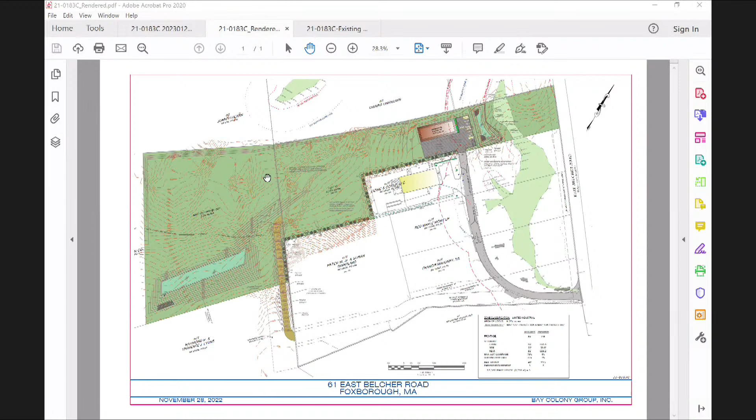61 East Belcher Road consists of two parcels totaling 9.57 acres. We have this front parcel here that our client has owned, and then we have this rear parcel here that our client just recently acquired. These parcels are located on the southwestern side of East Belcher Road, which is out over here. This back parcel is currently undeveloped and consists of a wooded area, while the front parcel consists majority of a gravel area.

And then there's a wood line. It's kind of hard to see it, but it's right around here. Now, someday you're going to get smart enough to get that cursor in red or something so you can follow it. Let me see if I can zoom in for you. It's right there in blue. Okay.

So this lot is serviced by a common driveway off of East Belcher Road. The property contains bordering vegetated wetlands in the front of the property, which we can see here. And there's also wetlands to the north of the property out back, but the buffer zone doesn't cross onto our property at all.

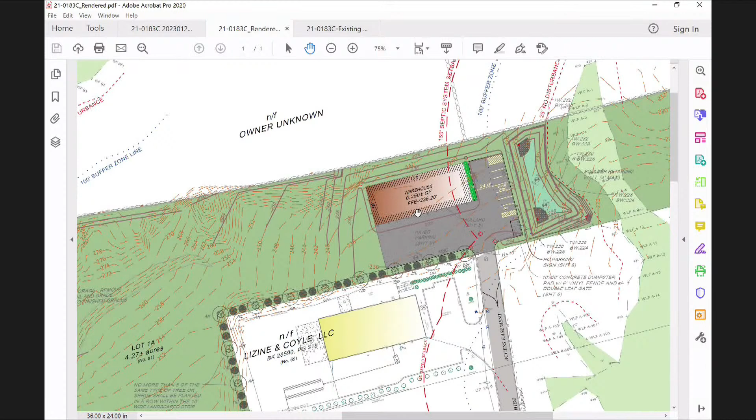Our client is proposing the construction of a 6,250 square foot warehouse along with the associated parking, grading, and utilities. A portion of the parking area, the grading, and the stormwater basin will be within the 100-foot buffer zone. I have the 100-foot buffer zone right here in the dots.

You can see the portion of the parking area right there within it, and the stormwater basin is entirely within it. The parking area will sit about 78 feet from the wetland at its closest point, and grading will take place about 27 feet from the wetland at its closest point. In all, it will be about 11,000 square feet of buffer zone being altered due to this project. We're not proposing any work within the 25-foot no disturb.

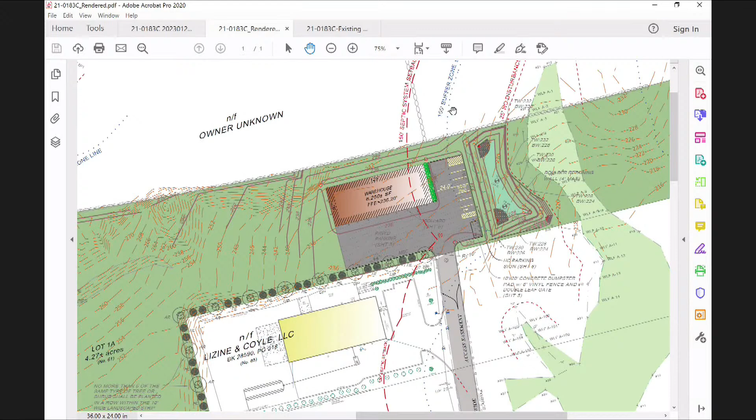This facility will be serviced by municipal water and a conventional septic system. I'm sorry, I don't show my septic system on my rendering here, but if you have the site plan, you can turn to sheet 4. The septic system is going to be located in front of the building right here, and it will be at least 150 feet away from the wetland, which meets the commission setback.

The stormwater system for this project will consist of roof drains, deep sump catch basins, and a stormwater basin. The runoff from the parking area will be treated by the catch basins before being conveyed to the stormwater basin, and the roof runoff will be conveyed separately to the stormwater basin. The stormwater system has been designed to comply with the DEP stormwater standards, as well as the Town of Foxborough stormwater management bylaws. The town's consultant has also recently reviewed the stormwater system, and we addressed all their comments. There's no major modifications to the site plan.

Erosion control for this project will consist of silt socks and silt sacks that will be installed prior to the start of construction and maintained until the project is complete and ground cover has been reestablished. A stabilized construction entrance is also proposed to prevent the tracking of sediment off-site.

Lastly, this site also lies within a Natural Heritage and Endangered Species Program priority habitat. Our client has taken the necessary steps by working with Oxbow Associates to submit a Massachusetts Endangered Species Act review in April of 2022. The division reviewed the project and issued a permit in September of 2022 with the condition that a turtle protection plan be submitted. Oxbow Associates has prepared a Blandings turtle plan for the site, which was included in my notice of intent packet.

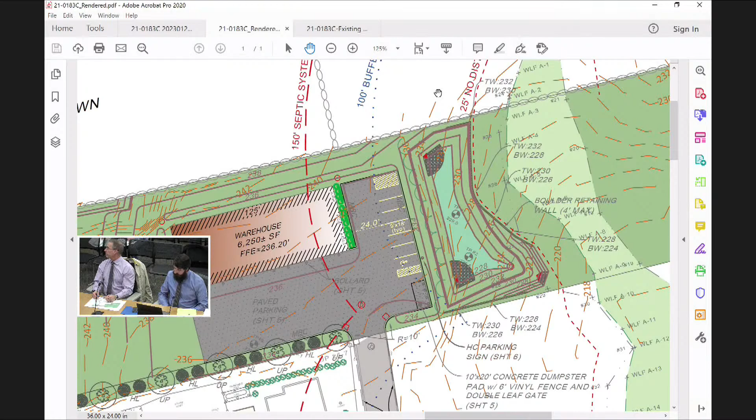So the blue right here is that wood line, and there's basically a build-up right there. Okay, and then after that wood line, nothing has been disturbed. Yep, so at this point, everything—what is that, is that 75 feet? Maybe 80, roughly, somewhere there. I mean, anything outside that hasn't been disturbed yet? Okay.

Now, getting back to the question of what our jurisdiction is—are you going to be grading on the other side of that pond as well? So I'm sorry, it's kind of tough to tell. So this is a rock wall, or a wall that I have proposed right here, and then I kind of just grade off into catching those existing grades while trying to keep everything out of that 25-foot no disturb zone. So you will be grading in that area then? Yeah, so we'll be grading that area, but we don't have any plans to go within that 25-foot no touch.

Okay, on that basin, is that—I mean, I'm looking at that, that's what, 230 feet right now? Is that correct? Yeah, so the top of my basin, I'm pretty sure I have it at 234. But yeah, so I got 236, and then it slopes off pretty drastically to that berm down to 230, 228.

Is that similar to what it is right now then? Yes, it kind of follows the shape of what is out there right now. Okay, all right, yep. That's, looking at the map without the work on, that's kind of what it looks like. Yeah, yeah. If you, when we go out there, you can see it's a pretty big build-up there. Yep.

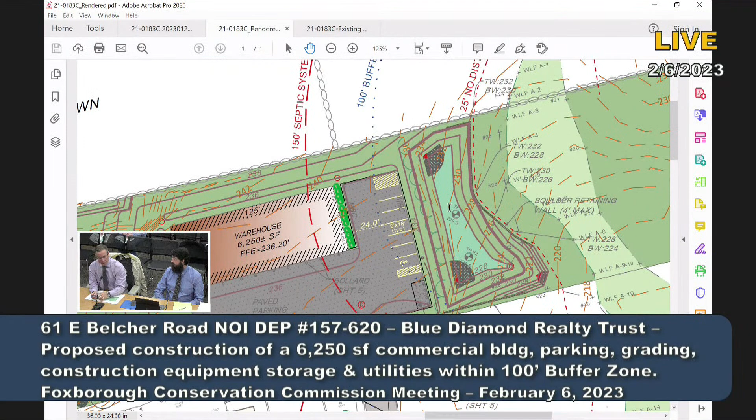The earth removal bylaw is old. I don't even know exactly, but normally I have a lot of history in my head. I think that bylaw was put in the 70s, or even the 60s. I'm guessing it was put in when 95 and 495 were being built, so land didn't have a lot of value, but the earth did.

So you come into Foxborough, and I can name some of the sites, because as a kid we used to drink there. We had the Spruce Street pits. That area was all gravelled out, probably for 495. Down by where I grew up was the Gavin's Pond area, which you guys are all familiar with. That whole area, now the Ames, and down in that area we used to call Tanglewood, was a whole gravel area, including going into Sharon. And on Beach Street, if you go halfway down from Mechanic Street, look on the right, you see this big rock face with a couple houses up there. That was all gravelled out.

So the earth removal bylaw was put in not for site plans and stuff like that. Whenever we go before them, I just went before the Board of Selectmen for one for a single-family house, and we had no buffer zones. They do it, it's like any other regulation. They have to look at it and say, what's the purpose of the reg, and does it meet it?

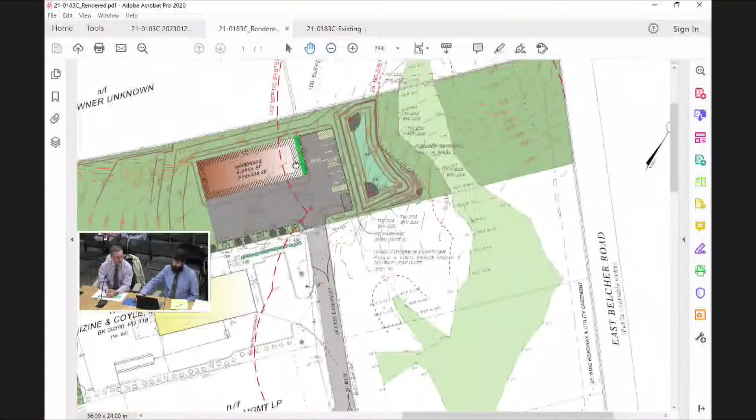But the earth removal we're talking about is on the back lot, Cam. It's not in the front lot. The front lot is pretty much done, except for down near the building. This area back here is where all of the work is, or most of the work, is going to take place.

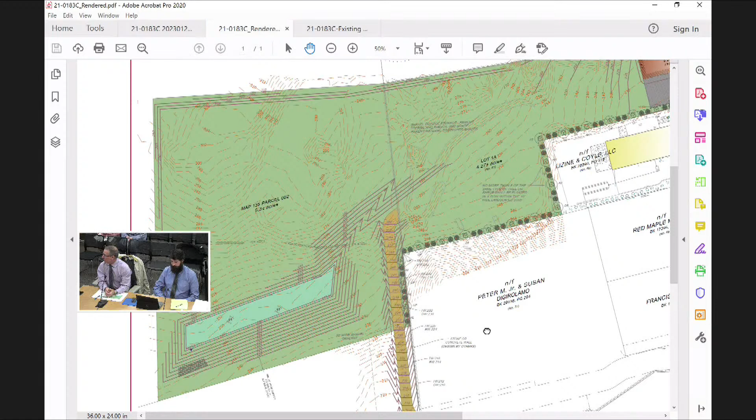When Jane said a 30-foot cut, that 30-foot cut is in the top left as you're looking at it, where the rocks are. So that area there is the area where the gravel will be removed.

But buffer zones are meant for a reason. Even these days, there's a reason for buffer zones with neighbors.

And then you have some endangered species habitat out there, though. Well, they've got the Foxborough report and the sign off. There's a possibility of Blanding's turtles coming in, and that's on wildlands, conservation land that they just received from some property owners. I think you still have that as unknown, right?

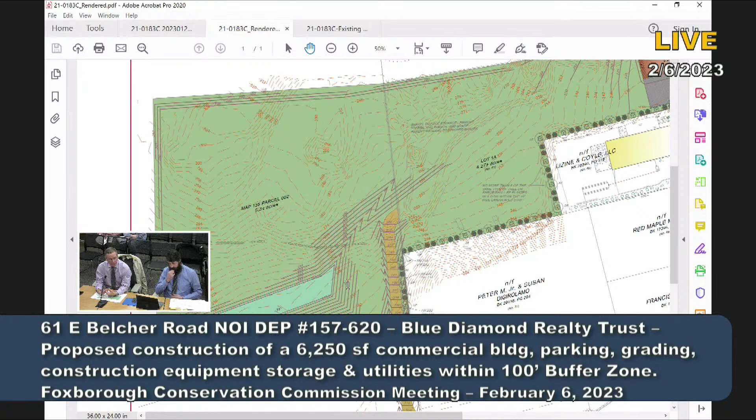No, it's to the left there. The owner unknown is to the north. We don't know who the owner is, the town doesn't know who the owner is. But it's the same person, the same entity that sold the land to my client. They sold it to 3 different people: to my client, to the Lions Greenhouse on Spring Street, and to this wildlife trust you're talking about. So it's true, and I understand what you're saying, it's a good point.

But we have no neighbors, so it's not a buffer issue. Typically, a buffer is to protect you from looking at things or noise or whatever, but there's nothing out there, it's all vacant land. Like I said, if the selectmen decide 50 feet, then we'll have to do 50 feet, it's up to them. But right now, we're just showing 10, which is a zoning requirement.

Does anybody want to do a site walk that wasn't able to make it? Yeah, right, I would go, yeah.

All right, when is convenient for everyone? Probably never. Jeff, what's your schedule look like? I could do it tomorrow around noon, and I could do Thursday easily. Dave, maybe 1? I'm open.

Let's ask the critical question: what's the weather going to be like? Thursday's supposed to rain, not as cold as it was over the weekend, 60% chance of rain Thursday. No, that's not a good one. Tomorrow's 40, Wednesday's 50, Friday is 60. Are you talking temperatures? Yes, temperatures. Okay, all right.

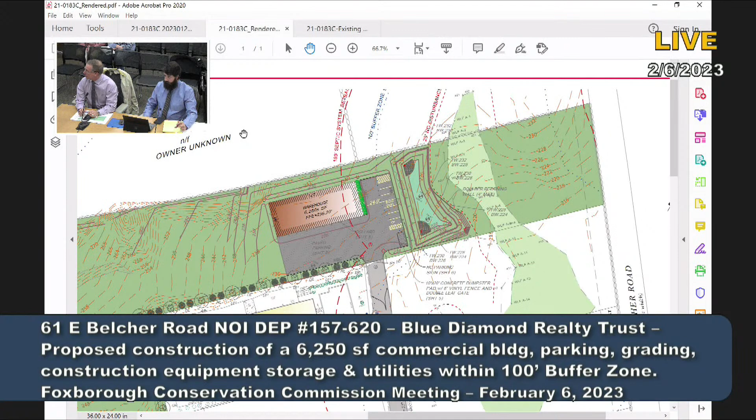So, what do you want? Well, like anybody else, we just want to make maximum use of our property. You can see if we move it to the back, the grade lines behind the building—that's more cutting if we had to flatten that out. And it fits; when you drive straight in the driveway, you pull right in there and don't have to go in front of the bays. So the stuff on the big asphalt is truck bay access. Yes, that's the only paved place. The rest of the site will just be gravel.

Now, does the fire department require access all around the buildings any longer? I'm 90% sure what they want is around 3 sides of the building. But they'll also get to make comments to the planning board when we hear from them Thursday—I know sometimes they want full access. It just depends on the chief, but right now I think 3 is the magic number, and we'll know Thursday once we get the comments from them. I haven't seen any comments from any town staff. Diana usually sends them to us.

I've been living in ZBA world. So I come back to the same question: why can't they take all that paving on that side of the building, put it on the other side, turn the building around, so there's less impact in the buffer zone?

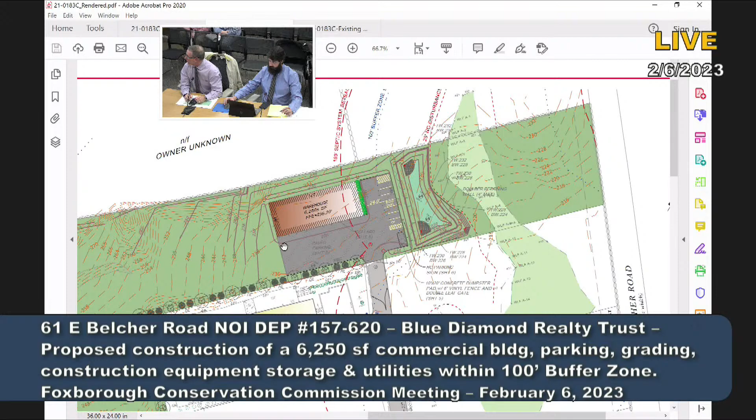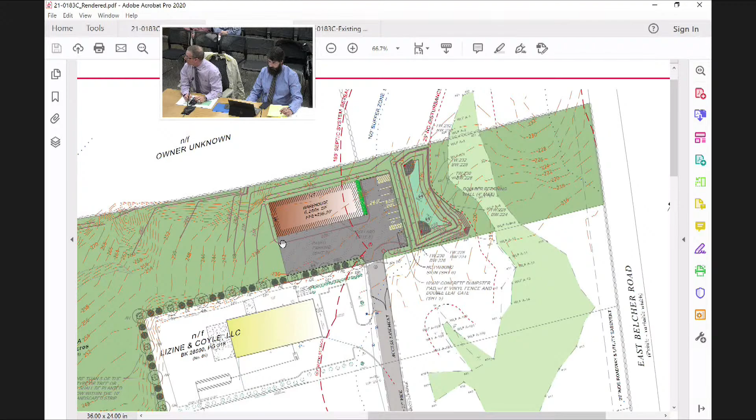I think where that parking is, though, isn't that already cleared? It is, yeah, that paving's just going on top of what's already gravel at the moment, right? Yes. I'm just trying to get it out of the buffer zone, because you're consuming 75 feet of wooded areas. But there are no woods there where that is now. No, I mean where his basin is proposed—yeah, basically you're wiping out 75 feet of buffer. Well, a little bit less than the other part of it.

Are you going to be doing a 21E for all those stains and spots? Probably not. That stuff needs to be cleaned up.

The good thing about something like this is when pavement is captured and brought into a catch basin where it's treated. If you look at catch basins nowadays, back when we were kids they had open bottoms and the water just went through. Now they're all solid and hold four feet of water with an elbow, so greases and anything lighter than water sit up in there and typically just evaporate, they don't go out into the basin. That's one of the positives of why paving is there. But no, we wouldn't do 21E for just stuff like that.

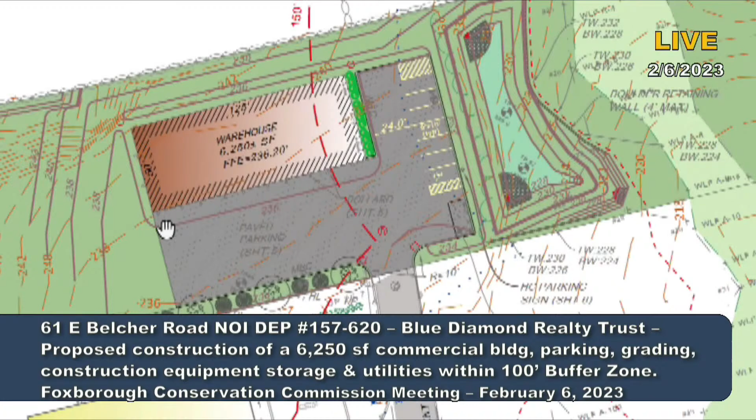Anything else? Nope. Motion to continue until our next meeting. Make that motion? Second? Discussion? Oh, before we do that, Jane, any final comment?

No, my report says it all. Bob, I'm really feeling pretty awful. I have to sign out, I can't continue this meeting, I've got to go to bed, I really feel terrible. Okay, feel better, Jane. All right, thanks guys, okay, feel better.

Any comments from the audience? I texted Gabby and asked her if the fire department wants access all around the building, and she says not anymore. She also said there's no comments from any departments yet, Bill.

Okay, Pete, so pick me up tomorrow? He'll pick you up? Yeah. Okay, yeah, yeah, I can do that.

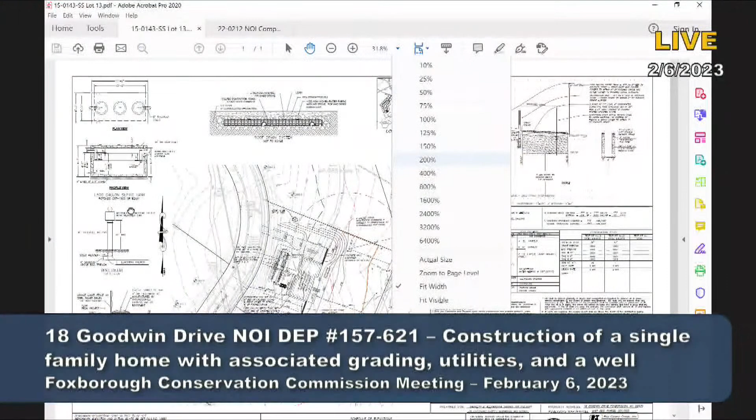What you have before you is a single-family home located at 18 Goodwin Drive. I'm going to zoom in here onto the locus plan to show you where in the subdivision. This is up in the Lawson Farm subdivision. If you came in the main road, you hit the first intersection. I don't know how many people have been up there lately, but the first phase is complete—all the houses have been built, and most of the infrastructure and roadway, though some sidewalk still needs to be put in, and some islands at the entrance. But the roadways are in, trees, etc.

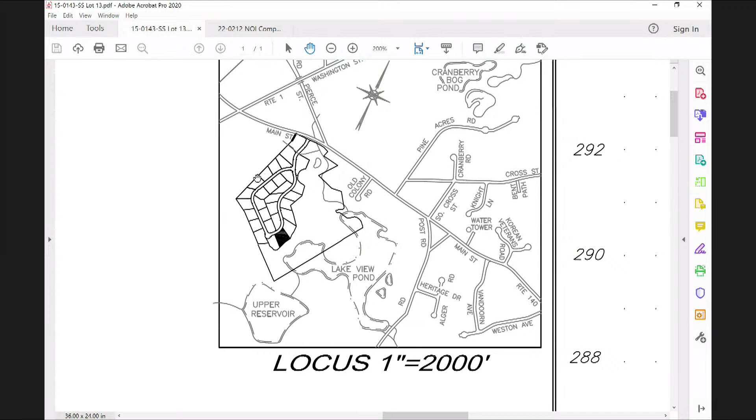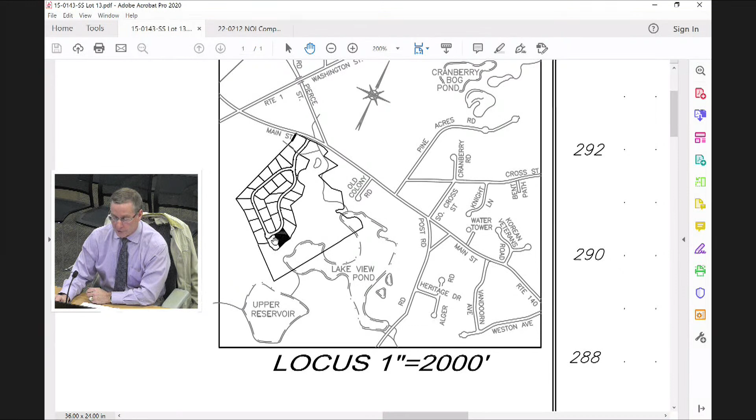But if you came in, went up the hill, and then came down here, this is the second phase that's just been built in the last couple of months. It's been paved pretty much to right about here. Number 18 is this lot down here. So you come down to the cul-de-sac, take the left, which is the only turn you can make, and it's not the first lot there, but the second lot on the left. Let me zoom back out.

This lot is undeveloped and contains about 52,000 square feet. It's in the R40 zoning district, which requires 40,000 square feet and 200 feet of frontage. There is some bordering vegetated wetland on the property in this corner, only a small portion—about 450 square feet—is in BVW.

I don't know if the commissioners remember, it's been a while, but this was originally an 80-acre parcel. When we subdivided it, we took about 40 acres and set it aside, which the commission will be owning someday, hopefully shortly. The quicker we get this built, the quicker we get it conveyed.

And what we did is we tried to cut out the lot lines so that there was little to no wetland on the lots. If you take a look up here or look at your plans, you can see there's a little path along the back there.

And it's actually not little, but there's a path along the back there, right along the edge of the property line. So this lot is on the property. It faces what will be future conservation land, has a small portion of wetland on it, and we're going to propose to build a single-family home. I tried to put it in color this time to make it better for us.

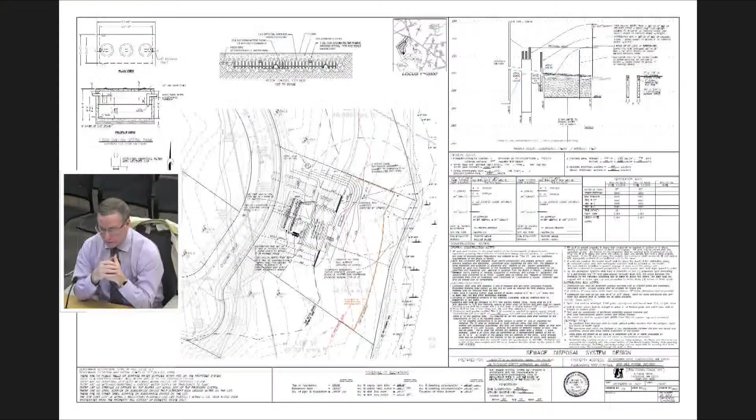This lot, if anybody's had a chance to get out there, and you'll see it on all of the lots, because I'll be coming in for these 4 or 5 homes that are along the line here, if you stand on the road, all of them drop off. As you can imagine, we're on the side of a hill, and we're looking toward Lakeview Pond. So these lots are definite walkouts, and anybody who doesn't want to walk out is a little bit crazy, but that's okay. This is a walkout, and it's along the whole back of the property.

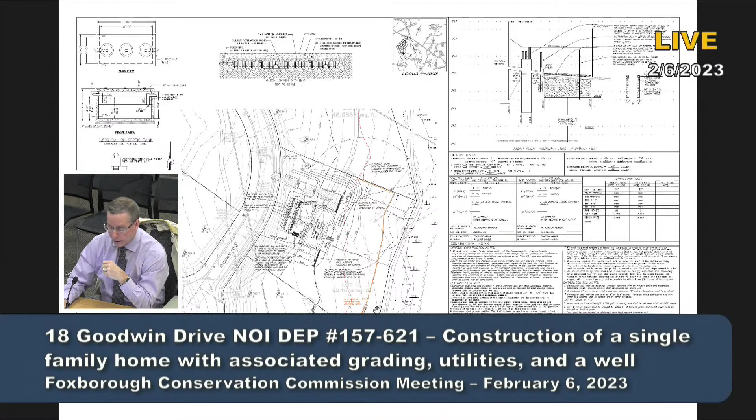So you can see this area in here. This is buffer zone work. We're grading in this area here, but the remainder of the area we are clearing. I know it's hard to see, but we are clearing this portion of the lot, and it's a lot of clearing along the back there.

We've stayed outside the 25-foot no disturb zone. But when you have a home like this, a young couple, they want to have a family, they want to have a yard, and that's what most people want to do, especially when they're buying big lots like this. So the proposed home sits about 114 feet from the BVW at its closest point, and then the clearing and grading will take place about 32 feet from the BVW at its closest point.

Which is this area right in here. This is the 25-foot line. You can see along here, only this portion of the lot has the 25-foot on it, and the remainder of it is well outside. But in this area here, where it kind of noses up into the lot, this is the area of closest clearing.

It's hard to see again, but you can see this note right here. There's a permanent monument there, there, there, and they're about 25 feet apart, on the 25-foot no disturb line. And what they are, as you've seen before, is concrete monuments. We put into the ground, they're 3 feet, we leave about 6 inches sticking up, and we put those plaques on them. So this tells any homeowner, hey, look, don't go beyond this, basically, without permission of the commission. So that area will be marked.

The total impervious area on the lot is only going to be 9% of the total lot area. None of that is within 100 feet of the BVW. The septic system is located in the front of the house, this area here. This heavier black line, the 150-foot, is the septic system setback line, and you can see the system is here. It's about 178 feet at the closest point from the wetlands.

I talked about the silt sock barrier, I talked about the monuments. The construction sequence for this type of project is very general, you know, until we have a contractor, but really it's almost always the same. They'll cut the trees down before they grub, put the erosion control fence in, then remove the stumps and grub it.

They bring the site to subgrade, which in this particular case is mostly in the front of the house. There will be some filling underneath the house. And over here on the north side, you can see there's a significant amount of filling in this area here, and that's because of the driveway.

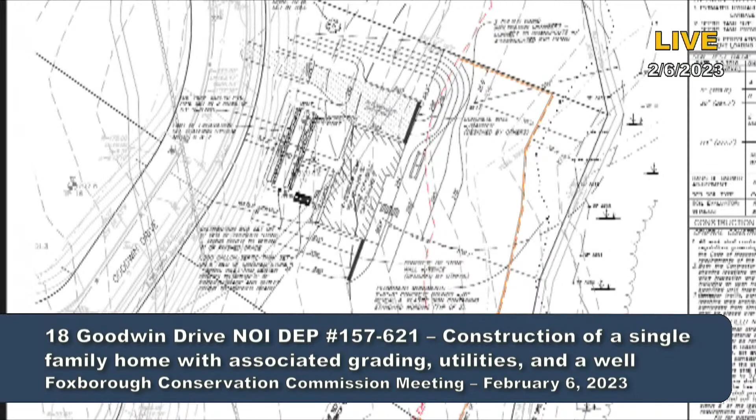So Jane made some comments in her letter, or maybe it was an email to me. She and I were talking about it, and she said, why don't you move the grading over here to the south side of the house, and that way we can push the grading further away from the wetlands and the buffer zone.

Let me show you why I explained it to her. I don't know if she passed it on to you. So if you look in this area here, I know it's hard to see, but right down in this area we're at about elevation 297 feet above sea level. The driveway is 292, so that's about 50, maybe 60 feet, about a 5-foot drop. That's pretty steep. I mean, it doesn't sound like a lot, but it's a steep drop, coming in and then going down. But then we flatten it out on the bottom.

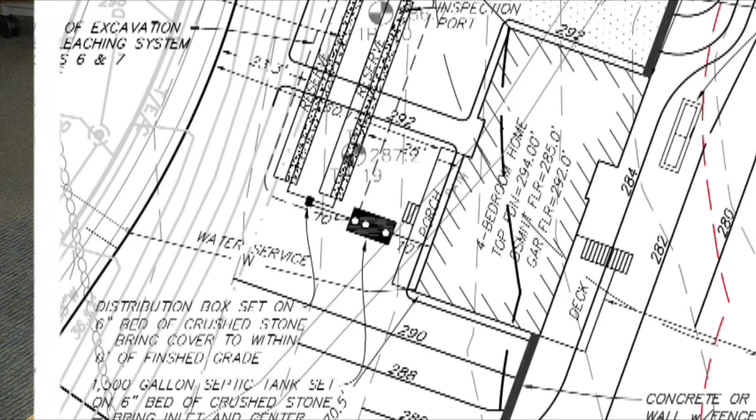So that, and even that includes bringing in fill underneath this garage and driveway. So we picked the house up as much as we could, but even then, the top of foundation is 294, and I know I'm throwing a lot of numbers at you, 294 above sea level, and in front here, it's 298 above sea level.

So that top of foundation is going to be about 4 feet below the road there. But when you go out there and look at that road, if you brought the driveway in over here, that elevation's 302, because this road is going down in that direction. So now we're at 302, and the garage floor is at 292, so now we have a 10-foot drop. That's just not acceptable.

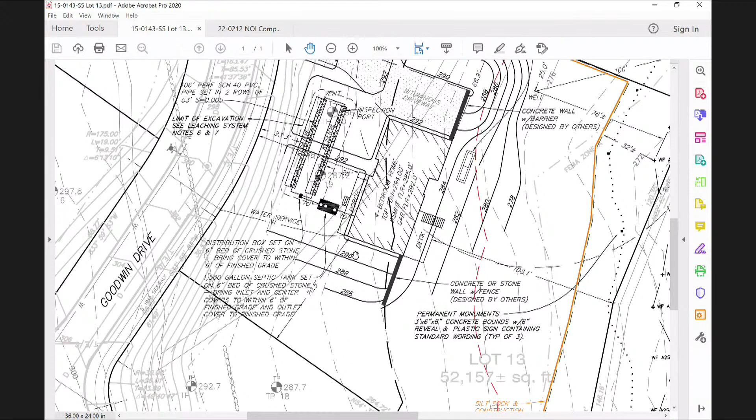I'm laughing because I've got 14, 15. Yeah, you have it. That's why it's not acceptable. I mean, yeah, you suck it up when you bought a house like that, but not when you're building new construction.

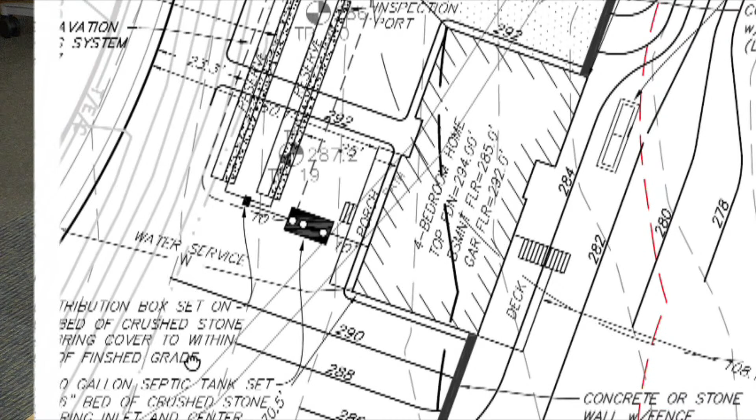We want to try and hold the grade to 5 or 6%, because we do live in New England, even though we haven't seen snow in 3 years. But so that's why, and I explained that to Jane, and she said thank you, gave me a comment back. So this is really the most practical area to put a driveway on based on the grades out there. And yes, we do have some grading back there, but we have put walls out there in order to minimize what's going on in the back.

There is a well. We're proposing a well on the lot, so you can see that area there. At its closest point, the well is 76 feet from the wetlands, and it's over here on the northeast corner.

They did try and bring it, the Board of Health did consider it, because I had a neighbor that had it in our neighborhood, like off of Linda Street, somebody had it on there, but then, all right, maybe I misheard. This is a while ago when we had the drought, because I planted a lawn that turned to weeds because I couldn't water.

Anyway, I'll tell you what the bylaws are in Foxborough. You can't have an irrigation—if you're a homeowner, you can have an irrigation well, it's all on you, and you can have a well for your house if you want it. Commercial, you cannot irrigate more than 10,000 square feet. So if you have a business and a big lawn, it pertains to places like Lions, but that's agricultural. I don't want to derail the conversation, I was talking off the top of my head. But you can have an irrigation well without limitations in Foxborough.

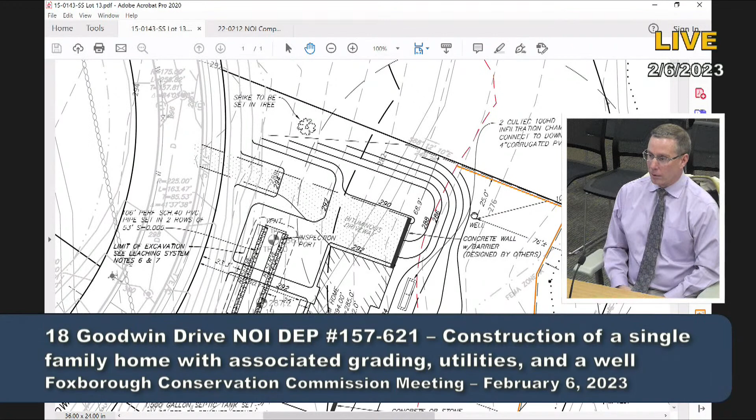The garage is underneath the house, is grade level at that point. So the garage floor is at 292 and the top of foundation is 294. So it's 2 feet below the top of your foundation, maybe 2 steps in your garage.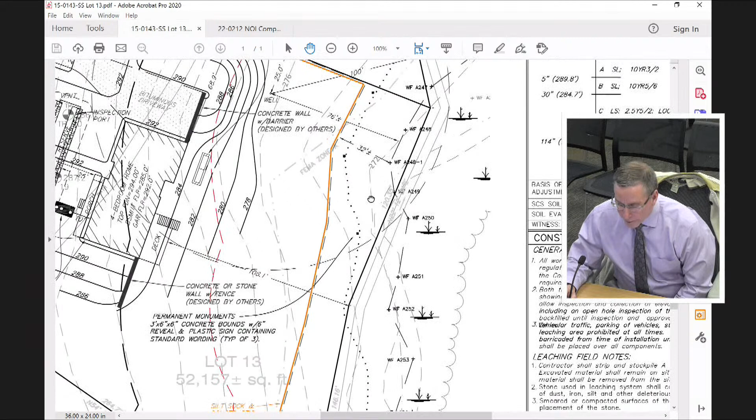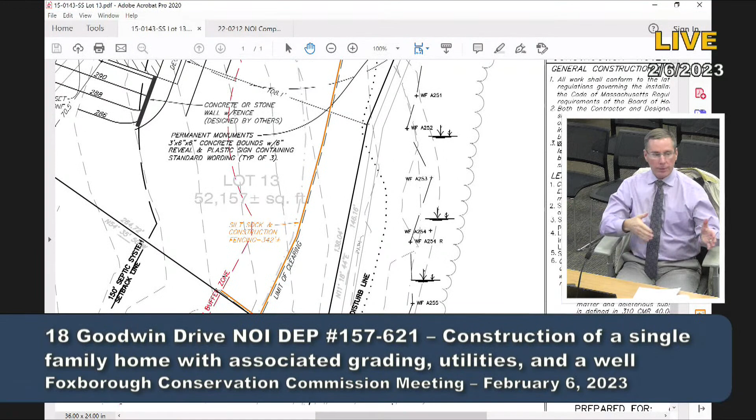Is there any boundary marker on the property line? Yes, in the back here, it's hard to see and it's not on these drawings, though it's on the drawings you approved. See this dot right here? That's a 4-foot high 6x6 post that will have a sign on it that says conservation land. We put that along the trail, anywhere there was an angle point, so when people are walking down the trail, they'll know this is the limit of where you can go. Don't go into people's backyards.

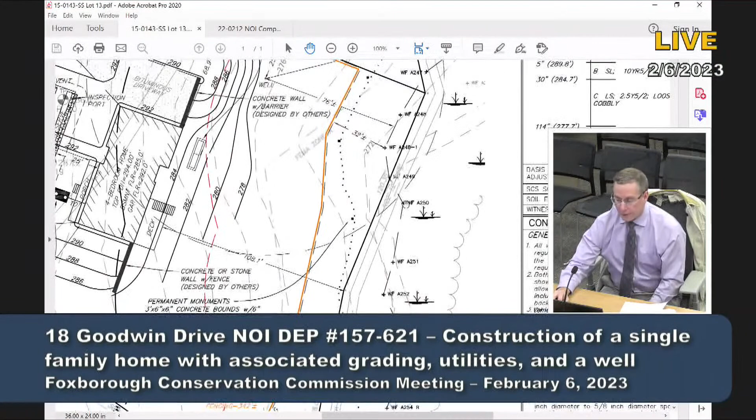My question was, there's no marker on the 25-foot line there, but it's right there at the corner, that edge where you've got the other bound anyway, so it doesn't matter. Yeah, because that's off our property. But on our property, here and here. I was thinking, right there at that point where the 25-foot crosses. Oh, right here. But you've got it right there anyway with the boundary line, so it doesn't matter.

A suggestion - I don't know, as you say, people walking down the pathway, because of that little finger of wetlands coming in there, they're going to end up on private property. I was thinking about it, and a suggestion might be to work with Jane and have the homeowner build an appropriate walkway over that wetland tongue there, to keep them off private property. Other than that, they're going to be walking around that.

It wasn't that wet, though. That path is so obvious, it's in the wet area. Jane and I were walking out there, and it was really wet - that tongue that comes in there. I think the developer could probably be asked to help do that.

I'll talk to Bobby, he'll be fine. I'll have him talk to Jane, see what she wants to do - maybe some stones, some rocks, whatever. But do you agree with that corner being very mushy? Yeah, it's mushy, it's very mushy. And I would also strongly recommend that the homeowner, because the vegetation in there is not very dense, do some heavy planting in that area - appropriate planting, blueberries or whatever.

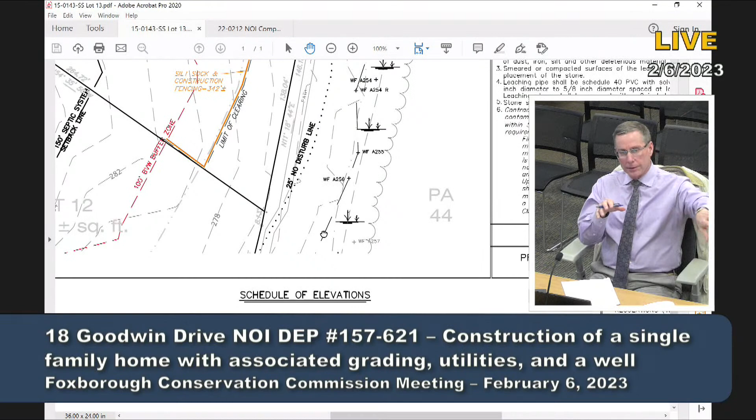It'd be more noticeable, I thought you had them a little bit longer. No, the concrete bounds are 3 feet. You can buy 4-foot granite bounds, but it's much more difficult to put those in. Are they wooden markers? No, they're concrete - these are concrete bounds, the ones we've used on all your projects. London Estates, we just did on that side road to the left, we put those along the yard. We can stick them up further if you want.

But, you know, the deal is, if you stick them up further, the frost will probably push them out of the ground. That's what I was thinking, or you can knock them off, and 6 inches is...

They can be found, I guess, at that point, if we're looking for them. And they're for the homeowner, not for the public.

Last question: off of the cul-de-sac, next to that lot on the left, is there a way down to that path, like we walked? No. So the way it's gonna work, I know you weren't on the board or commission at the time.

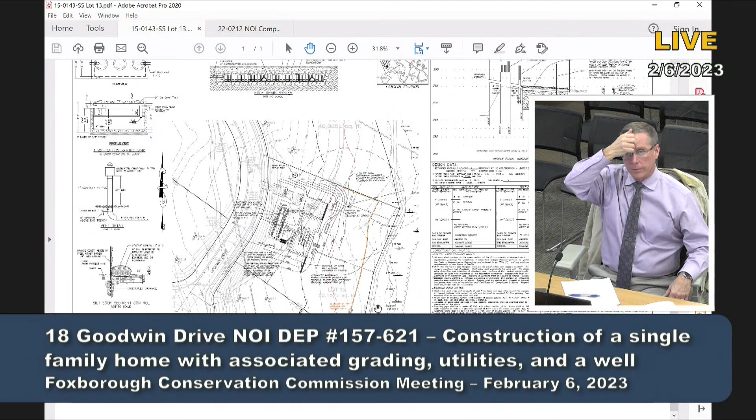So, you guys know the area, you come in off Lakeview and that's how you get there, or you come in off Old Colony Road. So the deal that the developer worked out with the planning board, and I know the commission had input, is this land is gonna be conveyed to the commission, and then one of two things has to happen: he has to provide access to the paths through the subdivision, or give you 10 grand so you can improve access wherever you want in town.

And he has not made a public announcement of what he's going to do. Is there a date on that, when it has to be done? No.

But your stick is, he can't get the roads accepted without an order of certificate of compliance. So the way it normally works is, once everything's done, everything gets passed off, everything gets conveyed, and then the town accepts it. I think this is Old Colony Road here.

He's getting ready to move into the third phase too, so it's good. Does it do a big loop? Does it go all the way around? Actually, it ties into the upper state reservoir forest. The upper reservoir, got it.

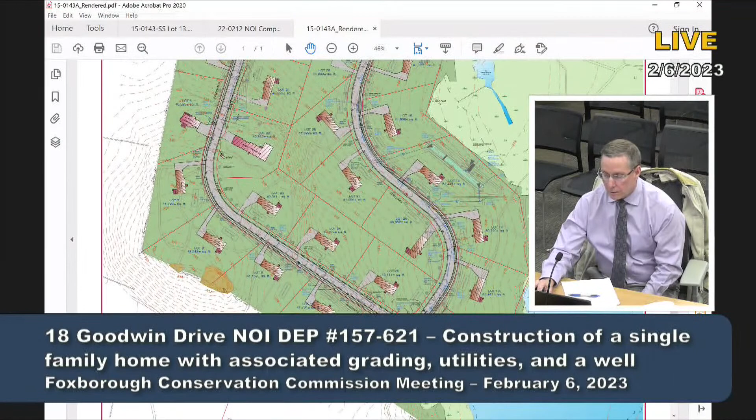So the whole section that's cleared, like next to the driveway, to the lot line, is that all gonna be lawn too, down to that? I know the guys want a big lawn, but I know, like if they went sort of from the corner of the driveway and left that, not just lawn. I was just putting this up in case you wanted to ask questions.

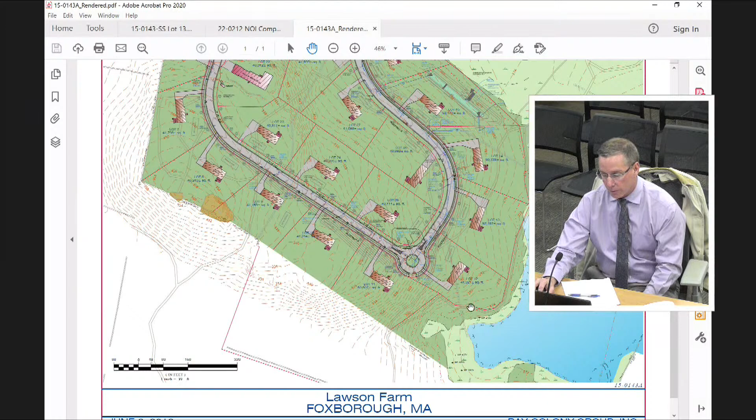Here's the path, it comes in from Lakeview Road, and then it skirts along the edge here. There still is a path, but it kind of ends right there because it's all been knocked out. But if you stay on this path, it goes around, and then it shoots up here in this direction.

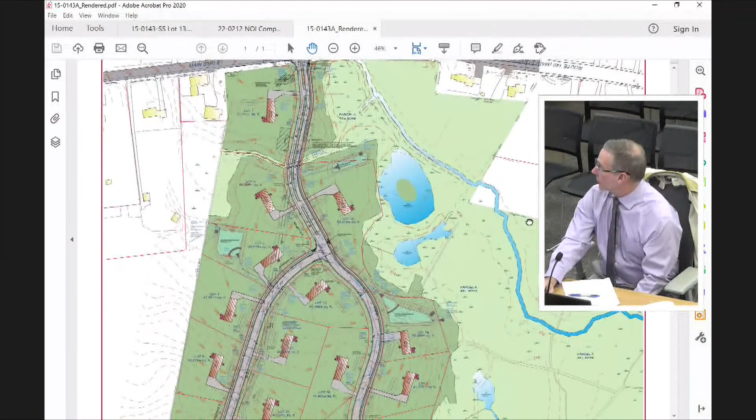And I know you can't see, but you can see how it goes through Lakeview there. Old Colony's on there, isn't it? No, it's just off of it. It's further to the right. Yeah, it's just off of it, but that's where it connects in.

And then this comes over here toward this basin, which would be in the third phase, in this area here. So if I was a betting man, if there was going to be access, it's going to be over in this area here.

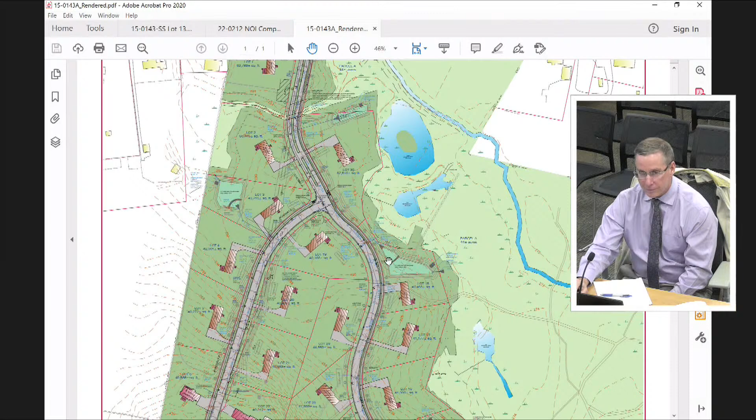Is that basin already in? No. And there's another one down further, closer to this house? That one's in, yeah. This one's in too, it's got this big pile of loam right there.

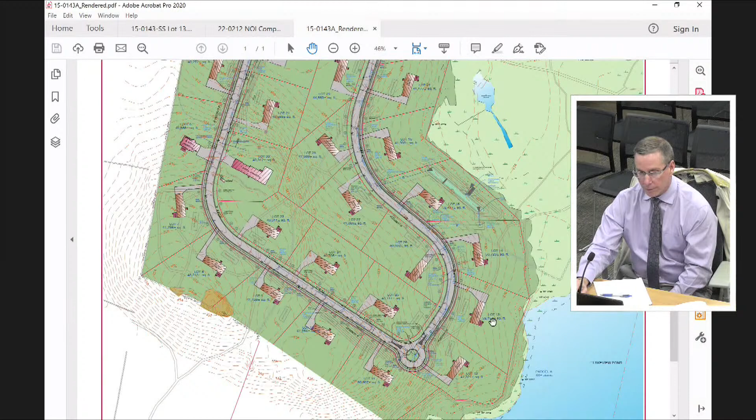This one's in, and the road ends right here. And we're talking about this lot right here. So the road ends right here, and we're stopping right here. Oh, they went that far? Yep, we had to take it that far to put this basin in and get the drainage coming through here.

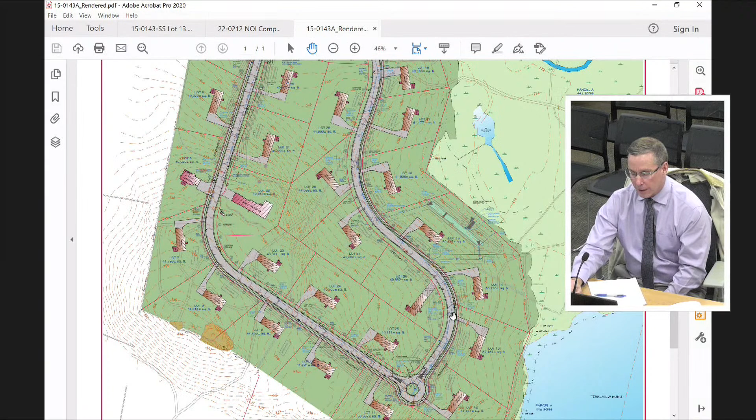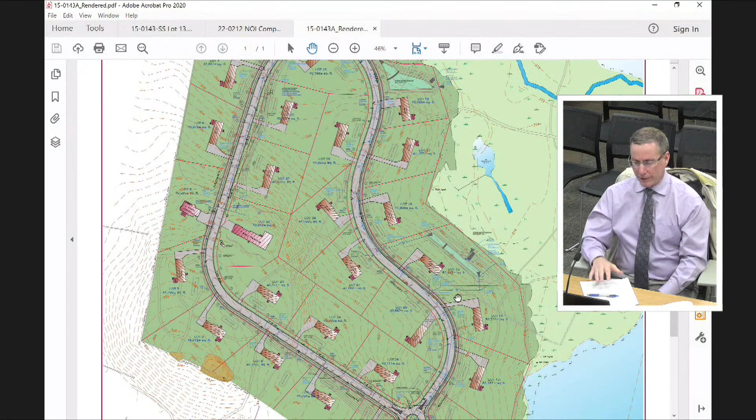So we're going to the planning board Thursday night to ask them to extend the permit, which ends in April for them. And if they say yes, which we fully expect them to do, they will be in there building this last section of roadway and trying to get those lots sold, which would be awesome, getting this thing finished and done, so you don't have an issue like Dudley Hill Estates, which took 20 years to get built out.

I'm sorry, let me go back, Rebecca, to what you were asking me.

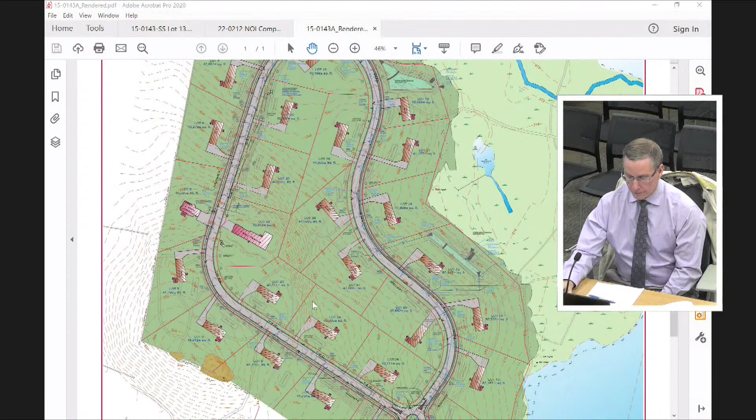This right here - I was just thinking, the area of the lawn that's behind and next to the driveway, that's the section that comes closest to the wetland. If they didn't make that all lawn, they'd still have a lot of lawn there, and it would provide a bit more of a buffer when you come close to that area, because it's closest to the wetland.

It's nice that you have like 50 feet for the rest of it. Well, the issue is in that area we have a 10-foot fill, filling 10 feet and grading it down. So there's not much else - lawn is the easiest thing to maintain, and it's all about maintenance. I don't know what else we can do in that area.

A perennial garden or a bee garden, or other stuff that's pleasing to the eye could go in as well. The point is lawn just equals nitrogen and phosphorus, right? And that's a big slope. So it's nice having the lake there, but if you don't want it to become green slime by August, the reason I want heavy vegetation put in there is so we can do more to keep it that way.

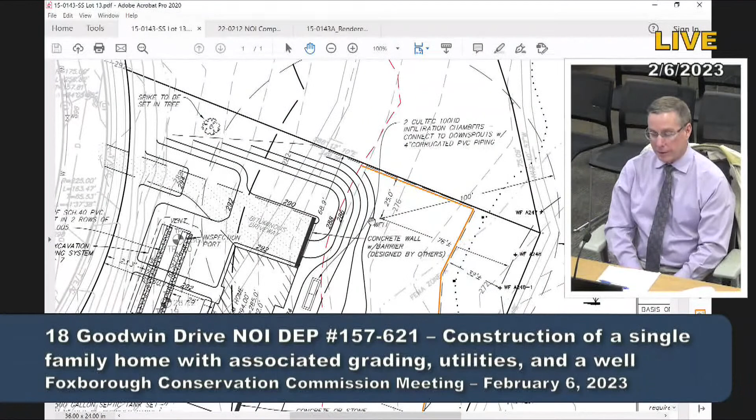I assume, Bill, that you're going to have the water come down the driveway and pitch to the north, garage doors to the opposite side of the driveway, not off the edge? So the garage doors are at 292, and you can see the end of the driveway is 290, so it's pitched off in that direction. It's got a 100-foot run before it hits the wetland - you can see the red line there.

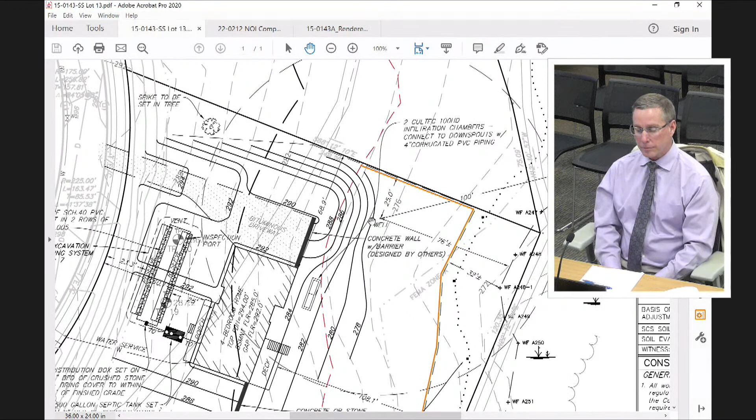I didn't mention this, but all the roof drains, as always, will be connected together and infiltrated into the ground. So every lot in this subdivision, and in any subdivision lately for the last 15-20 years, will have that type of system - Cultec infiltration chambers. And that is also just outside the 100-foot buffer.

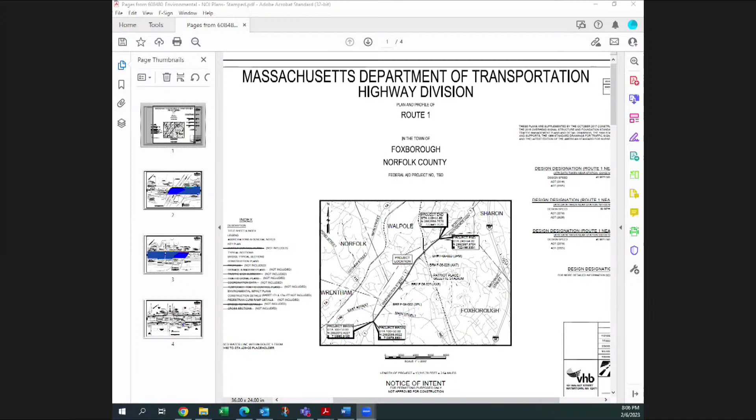So I do have a few relevant sheets from the plans to share. Again, this is a roadway improvement project along Route 1 between the Walpole and Wrentham town lines, all within Foxborough. There are several resource areas along the project limits where the work will be within the 100-foot buffer zone to bordering vegetated wetland and bank, but there are only two locations in particular where we actually have work within resource areas.

This is the work by the Neponset River, the crossing under Route 1 before it goes in the vicinity of Gillette Stadium.

Paul, can you turn it up please? Thank you, you're dropping off in volume. We're losing you, it's intermittent. Sorry about that, is that any better now? Yeah, much better, thank you.

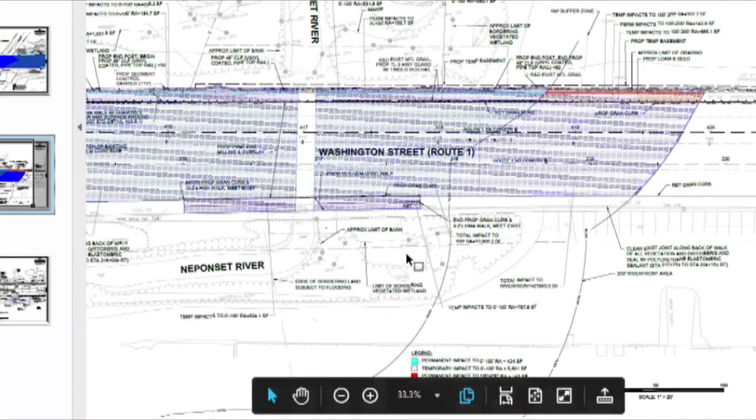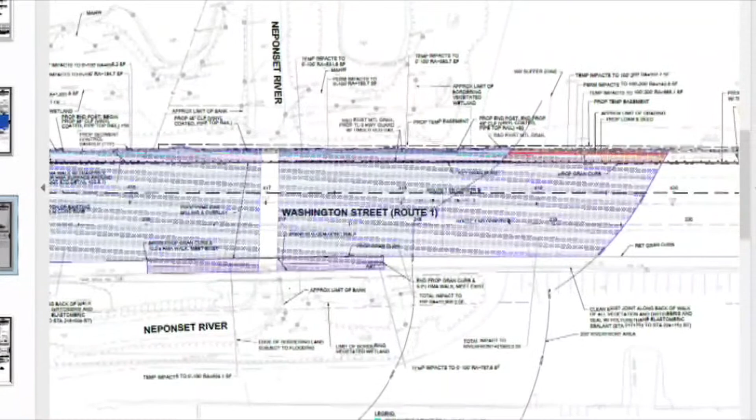So again, this is the portion of the project limits within the riverfront area associated with the Neponset River. A lot of the bulk of the work of this project is actually just pavement milling and overlay along the roadway corridor. There is some minor permanent impact to riverfront area, associated with work needed to reconstruct sections of the sidewalk in this area. Other temporary impacts are just associated with guardrail replacement and loam and seed installation along the shoulders here. Again, no work in the Neponset River or associated floodplain is proposed at this location.

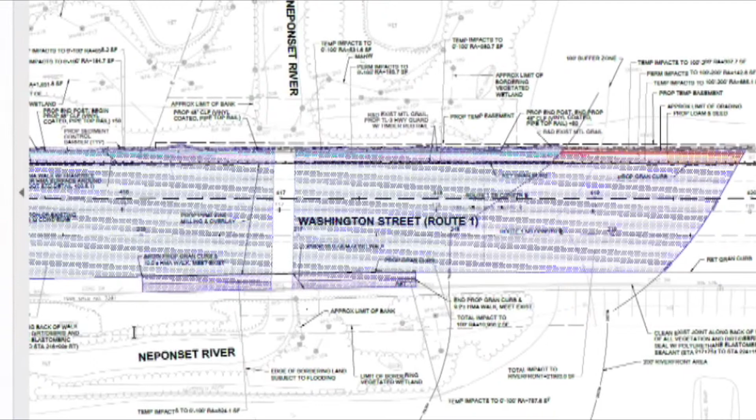The other area where we do have work within a resource is right near the Lincoln Road intersection. There is really what was designed to be an equalizer pipe between two wetland resource areas on either side of Route 1. One section of the headwall on this side has become quite deteriorated and has accumulated a lot of sediment and debris through the years. So the plan here is to clean out the trash and debris that's accumulated, as well as sediment, and reconstruct the headwall. This is about a 36-inch culvert.

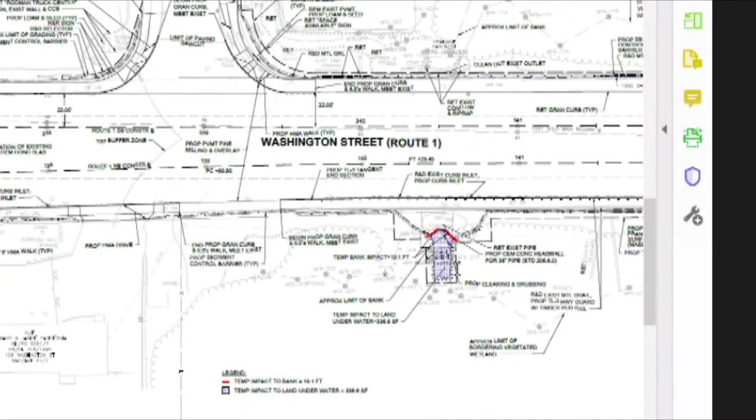There will be some temporary impact to land underwater associated with actually reconstructing the channel of this stream. That will then be readjusted with a modified rock fill and covered with a natural substrate. There's actually no work proposed in BVW in this area, it's all contained within this channel. And in all other areas along the project limits, we are proposing erosion and sedimentation controls between the limits of work and any wetlands along the corridor.

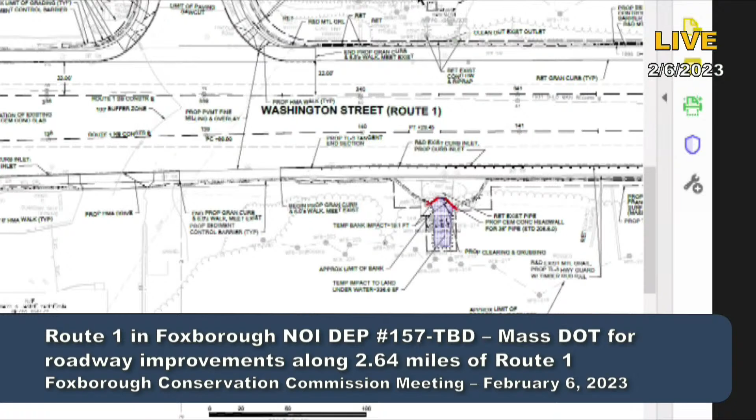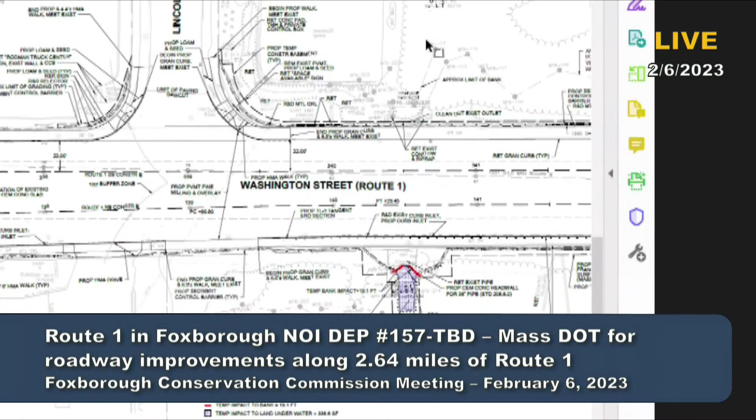This can also be permitted as a limited project under 1053-3F, which allows for maintenance and repairs of existing roadways. So at this point, I'll open things up to the commission for questions, and our engineers are here to answer more technical specific items.

Thank you for that. I guess the first question I have is, when do you plan to start construction? MassDOT plans to put this out for public bidding later this summer. It could start as early as this late fall, but I would anticipate most of the work will start next spring.

Do we have any questions for the board? Jane and I looked at it, it's pretty straightforward. Dave? No, it's pretty straightforward, fixing the road right now. Yeah, their biggest problem will be any heavy rains on exposed new soil and seeds, it might wash out into the buffer areas. But they've got silt controls out for that, so I don't foresee any problems.

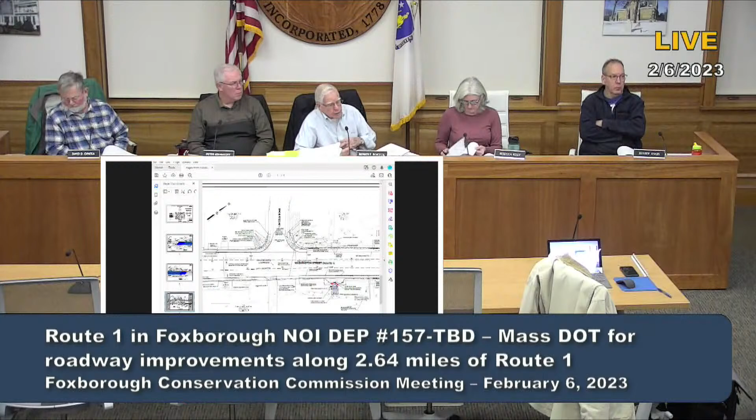Actually, I don't have any problems with it. As I say, the agent and I discussed it, and I think she's all set with it, so without further ado, unless you have some final comments. None myself. Anyone else on the team? Nope. Should be up. Okay, nothing from the audience.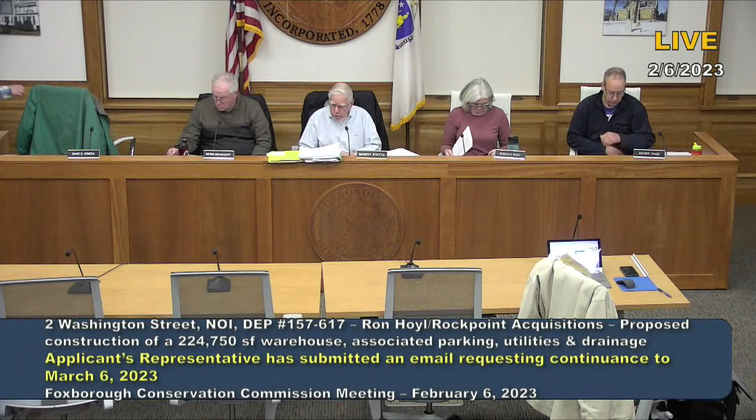At 7:20, we have 2 Washington Street continuation. The applicant has requested continuance to March 6th.

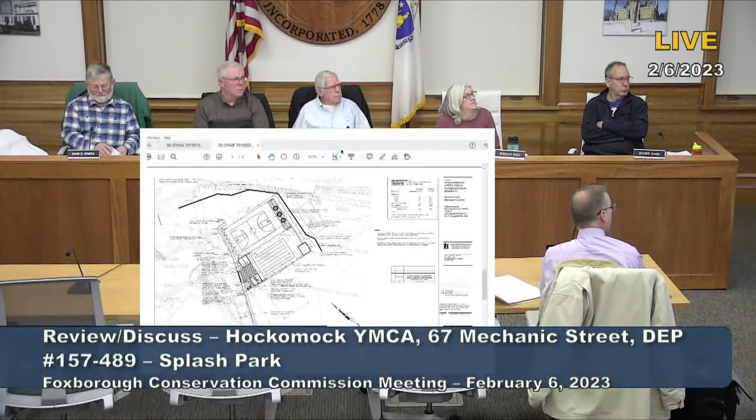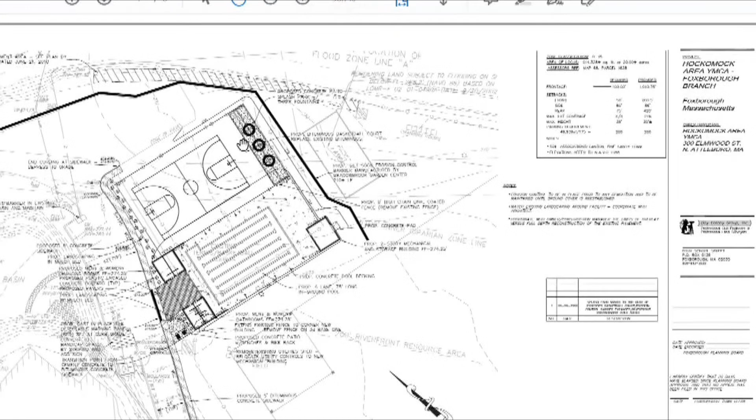I'm going to share my screen—good. This is the phase back in 2010. This area was basketball and tennis courts at the time. So what we came in and asked the commission for was to take this portion here and turn it into a pool, continue to use this piece as basketball, and in this area back here was the splash park. That was the original design approved back in 2010.

Then we came back for a minor modification, and what we did was eliminate the splash park for the reasons Greg pointed out. We finished the project, I believe, in 2013.

I was just going through my notes. We filed a request for a certificate of compliance, which included this work, but also included some remediation along the river just north of the site. In case anyone's been there, as you come in on the Y it's all heavily vegetated, but right there on your left is Robinson Brook. It starts over at the Foxboro Company and then heads to Mansfield.

So, for some reason I have no idea, we filed the request for a certificate of compliance, and then nothing happened. I don't know what happened, and I don't know why I didn't follow up.

Jane can't remember. Of course, you see how crazy she is with notes. Her notes are the best. She went back through her notes and still couldn't figure it out, but whatever.

So we have this open order of conditions which has expired. The Y came to me and said we want to rejuvenate this. I'm like, great, not a problem. The order's still open, it's pretty much already been approved. Let's just go back and ask for a minor modification, because the splash park now is a little bit different, which I'll show you in a moment.

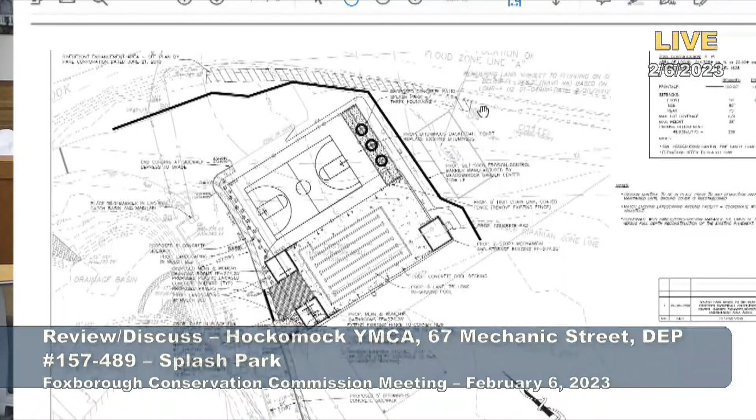We were going to come in two weeks ago before that wicked 1.5 inches of snow that cancelled the meeting. That was embarrassing, I'm sorry. I mean, come on, we're from Massachusetts. That wasn't my request - it was a request of higher ups. I know, and that's okay. I had something in either Wrentham or Sharon the same night, it also got cancelled. But anyways, so this is the thing.

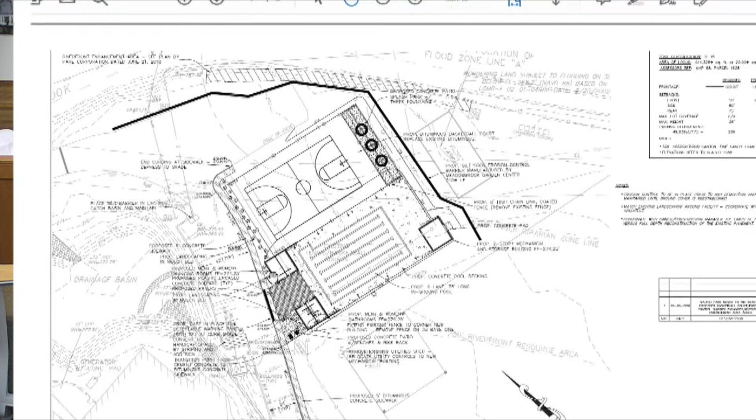You can see it, the pool has actually been built. It's a little bit different. This shows it as there was going to be two separate buildings, I think one was going to be a boys' bathroom and a girls' changing room, and this was going to be the pump room. And then what has been changed, one of the modifications we showed you at the time, is this went to one building, and that's in the same general area. So let me go now to the next one.

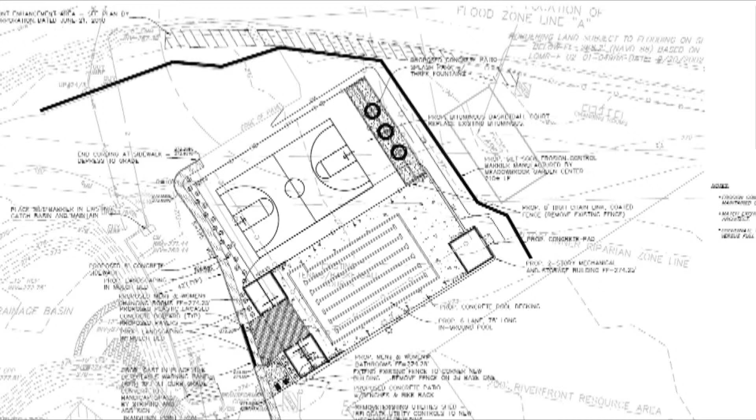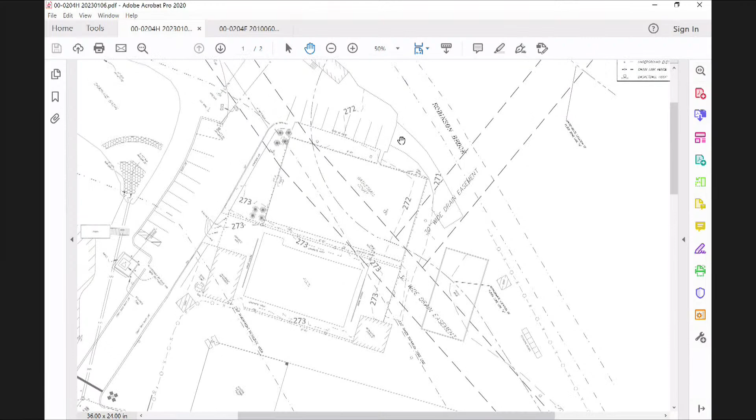So this is the existing conditions - actually, this is the existing conditions plan right in this area here, which would be the first sheet I gave you. This area is the pool, and you can see that changed to one building, the mechanical room is still there, the basketball court is where it is, and then this area right here, which is not labeled but should be, is the gravel that was put in at some point.

Now where's Robinson Brook there? Right here. Okay, alright. This is Robinson Brook. Okay, alright. So that's that area there, so that's the existing conditions and what is built there now.

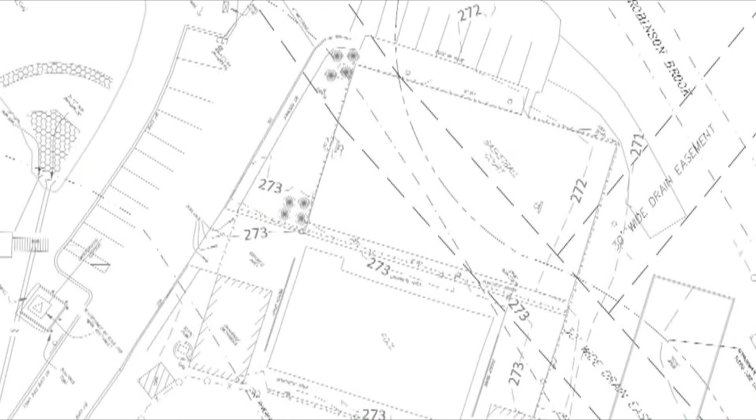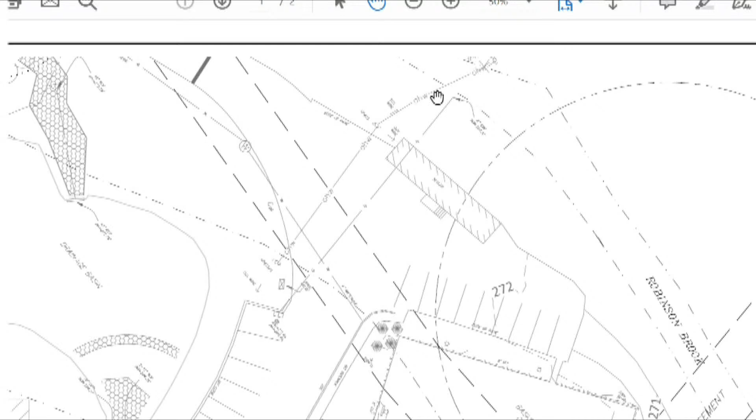Is there a shed somewhere along there that was added? Right here, a trailer, this is a trailer that's in the parking lot there. How close is that to Robinson Brook? It's pretty close, probably 75 feet, but it was supposedly built on the paved area - it's a trailer on wheels. And it was supposed to, my understanding was, be temporary. It's pretty permanent - been there for more than a few years. We can discuss that and try to clean up any other issues along there, because I know that was a concern of Jane's. That could be one of the things we deal with when we go for a certificate of compliance.

So was the restoration area restored? Yes, but we have no proof of it, because Jane couldn't find any proof of it.

We have a letter, when I submitted my request for a certificate of compliance, we filed a letter at that time from the landscape company that did the work, as well as a notation from Pear, because they had to do some modifications. They couldn't find certain plants, so they used other plants. But the short answer is yes.

Did I ever see it? No. If I saw it, I wouldn't know what I was looking at anyways. So that's why we have the guy who did the plantings and Pear. But that was 10 years ago.

So that needs to be reviewed. And again, that could be something that we need to deal with before the commission issues a certificate of compliance for the open order. So something that was added.

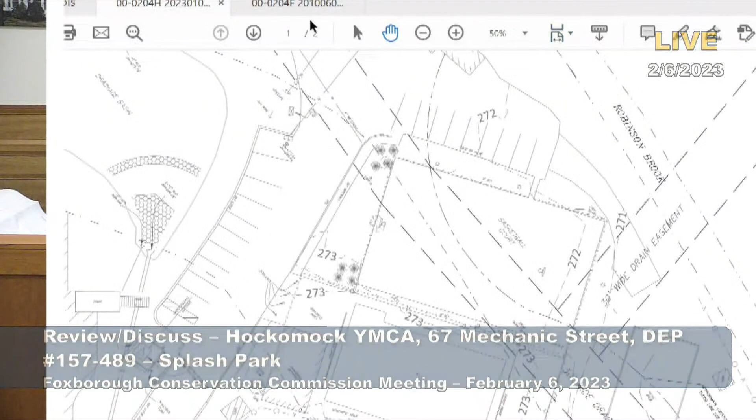Per your existing plan, is that gravel area, or road path or whatever? Yes. And it looks like it goes to the picnic area, what used to be the picnic area. Yeah. On the 2010 plan, yep, still shown as that. There's the 2010 plan, and this shows it as, it's still there.

But that area needs to be, we need to work on that to get it back to where it was on the original plan. But this area right here, this basketball court, and I wanted to show pictures. Let me show you some photos.

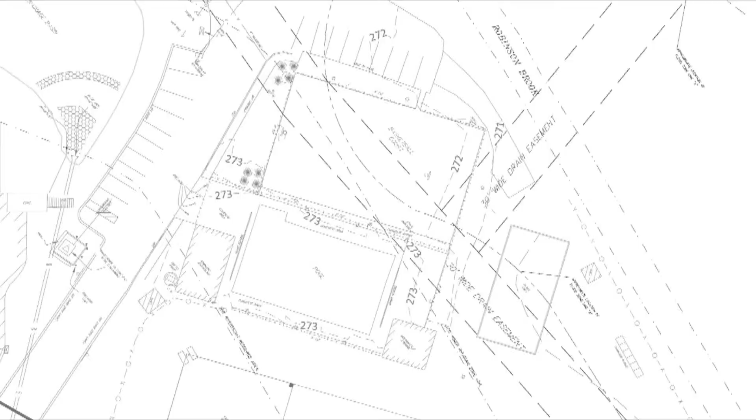Why is that not showing? Okay, stop share. Share. And we'll use this one as a good one.

So this is a picture, if you're coming in right here, this is the driveway coming in, there's the main building, there's the pump house in the back, there's the pool, this is the basketball court. So just to orient you to what we're talking about, all of the activity, all of the future, any pavement is going to take place on the existing pavement.

Let me go back to this now. So let me go now to the next sheet, if you can flip through your sheets. So this shows, again, here's the pool, here's the changing area, here's the mechanical storage. This is the basketball net area.

What we want to do is have, it says four square hopscotch, whatever they're going to do in that area there, kind of a half basketball, pickleball area in this area. And this is the splash park.

If you remember, the splash park here, when the original drawing was in, actually the first drawing had the splash park here, then we modified it, and in the approved drawing the splash park was in the back, and then it was eventually eliminated.

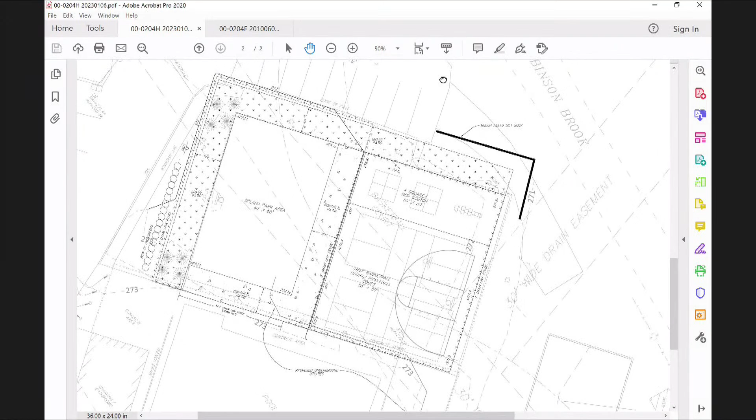Let me now show you some kind of cartoonish pictures of what the splash park will look like. These are just some renderings that were done for us. They're not exactly probably what will be, but it gives you a flavor, it will give you a flavor for what it's going to look like.

Why can't I get it up. Bill, do you need me to see if I can find a picture of it? No, I got it here, Greg. I have it up, I just can't call it. But hold on, let me close some of these other ones, and maybe that's the problem.

While you're doing that, Bill, is there anything at the edge of the pavement to keep the water from running down to the brook, now and in the future? No, there's nothing on it. But it's also not like there's cars on it. Yeah, so normally what we want to worry about is, like David was pointing out earlier, is oil and grease. Right, I know, yeah. This is just kids on a basketball court.

So no, we don't show anything other than the fact that there is a slope. I know there's no grade to it. It's more of a question, is there any erosion possibility of water running off? There is a little bit there, which is what I was showing you on this.

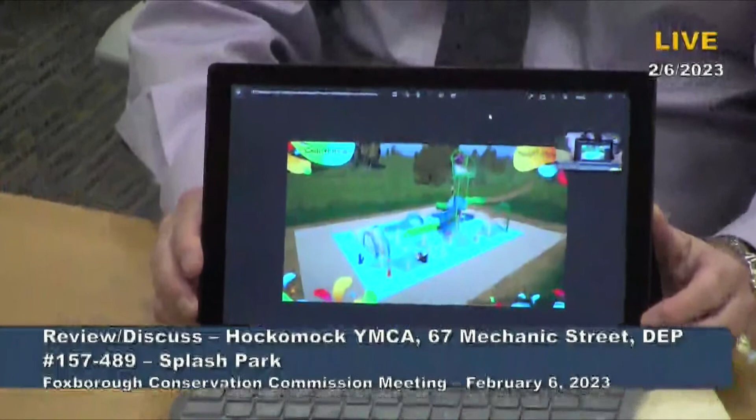Now, could you hold that so Mr. Beck can zoom in on it? That's what I said, make sure he shows the camera. Can you see that, Paul? Wow, look at that, technology. Somebody's watching me.

Good, thank you sir. So I guess what we're asking the commission this evening is whether it would be an appropriate way to move forward for us to file a request for determination just for this, which is on existing pavement. It's not any alteration other than some landscaping around the edges, and then we'll move forward and square away that order of conditions when the weather turns.

It will be the same time as this. It's just that we can't do it until the weather turns. So we'll get Jane out there whenever, March or April, for her to look at it. And then when we go in there and do the landscape portion of the work, we'll fix the rest of that as well.

Anybody have any difficulties with that? No, I go with Jane's recommendation, request for determination, and somehow or another work out the piece of paper to close the old, expired order. I'll let her figure out the details on how to do that. She would work with MACC, or we'll leave that to Jane. We'll get Bob Bunstein from the Y's, the facilities guy, and his planting guy, whoever it is.

Actually, Pear did the plan, and I don't know the name of the company that did the work. They can work that out together. And I'm very confident that by the time this thing opens, we should be pretty close, if not done, to fixing the other stuff and getting that closed.